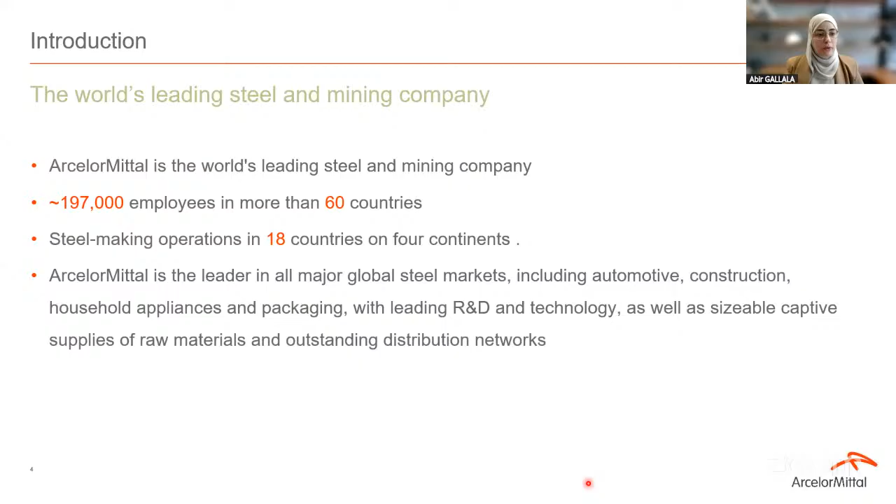Through cutting edge technology and innovation, the company is transforming the steel industry by creating advanced low carbon solutions that support a more sustainable and future-ready world. So here are just some highlights of where you can find us.

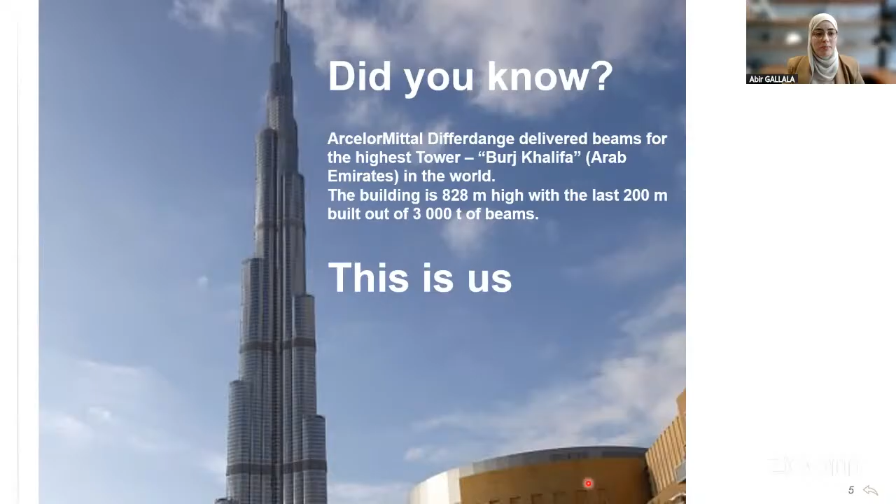For the Burj Khalifa in Dubai, we produced 3 kiloton of beams in Differdange, Luxembourg. Also, you can find us in Venice, Italy, where we produced 150 kiloton of steel for the MOSE project. And also the Freedom Tower, made of beams from Differdange.

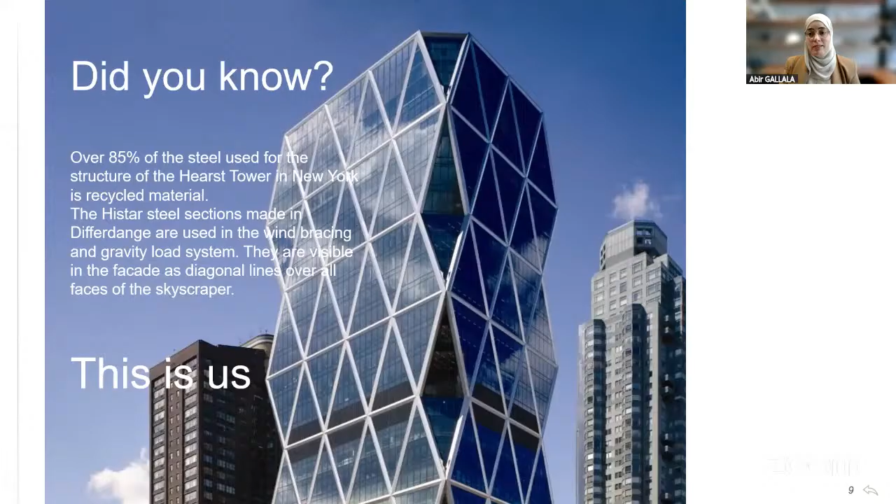Luxembourg has long products and flat products segments. For the long products, it's more for infrastructure, construction, energy, mechanical engineering, automotive, and so on, and we are focused on infrastructure sheet piling.

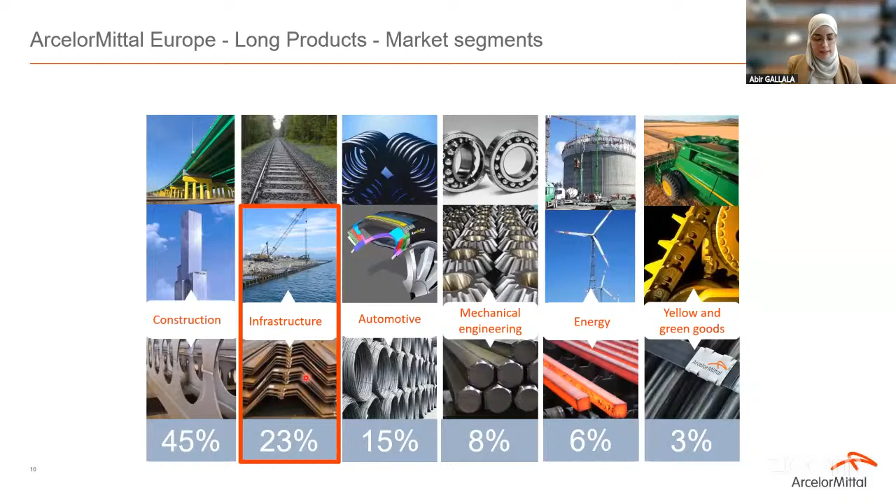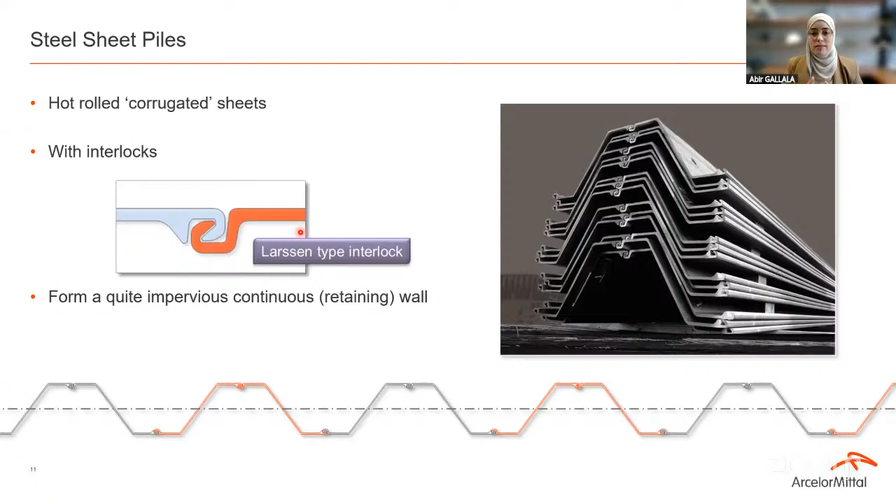To understand what steel sheet piles are: these are steel plates, interlocked steel sections together, used to build walls that retain soil or water, like retaining walls, cofferdams, foundations, also providing strength and durability, and are also very easy to install.

For sheet piles, we produce in Luxembourg with 2 mills, in Belval and Differdange, for hot rolling, and in Poland at the Dabrowa mill, and also one in France for cold formed products.

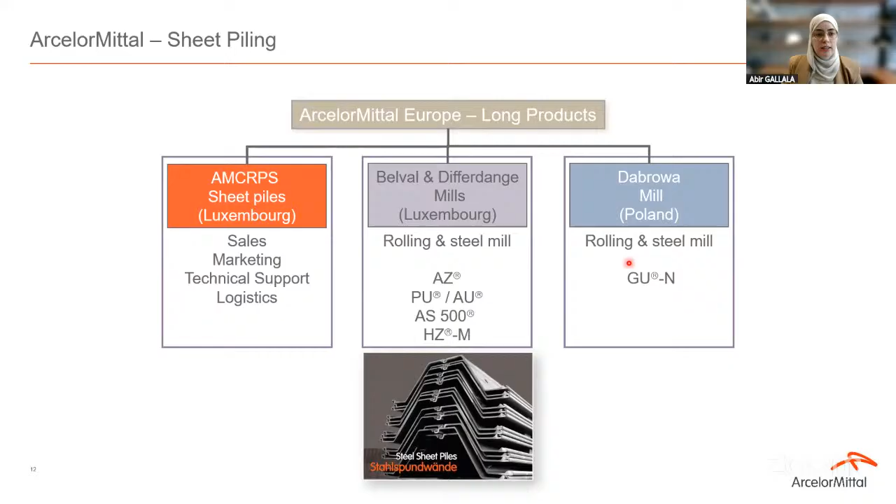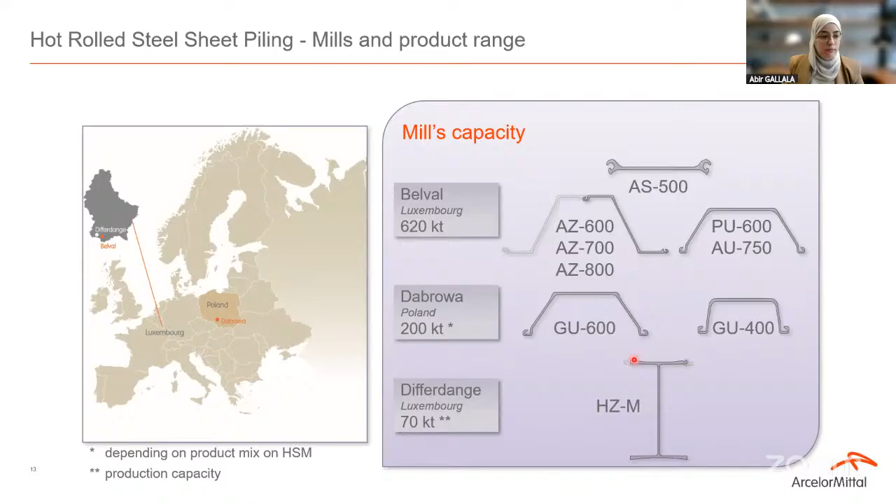For what we produce in Luxembourg and Dabrowa, Poland, there are different profiles depending on the size, dimension, or shape. We have the AS flat or the AZ, what we call AZ, PU, or in Dabrowa, Poland, different GU, and in Differdange, the beams, what we call HZ-M, also with different production capacities.

So where or how do we use these sheet piles produced in Luxembourg or Poland? We have 5 main applications, 4 of them being permanent solutions: one for mobility infrastructure, for water transport solutions like breakwaters and port quay walls, hazard protection like dikes, and environmental protection solutions to isolate some space or area in the water, for example, or in the ground.

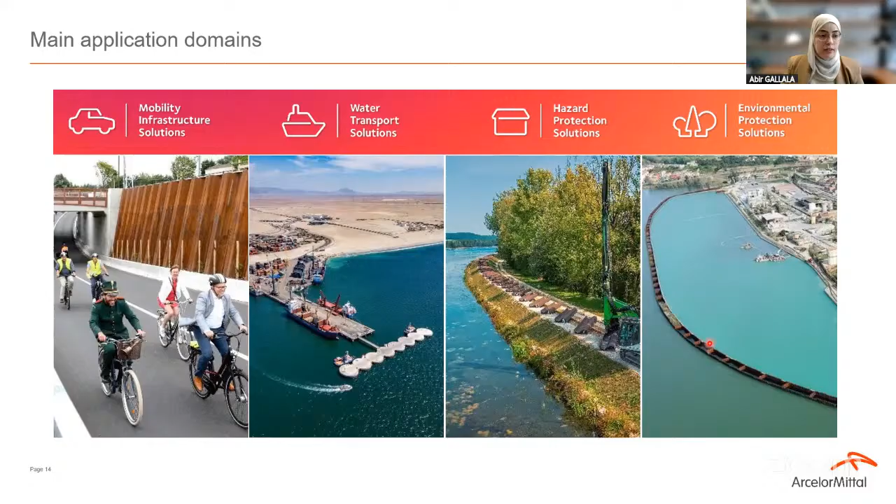So a few examples of our permanent structures: we produce sheet piles for a retaining wall for a metro line in Denmark. Here you can see in Poland a bridge abutment, also a quay wall in Poland, and in Germany a flood protection solution and dikes.

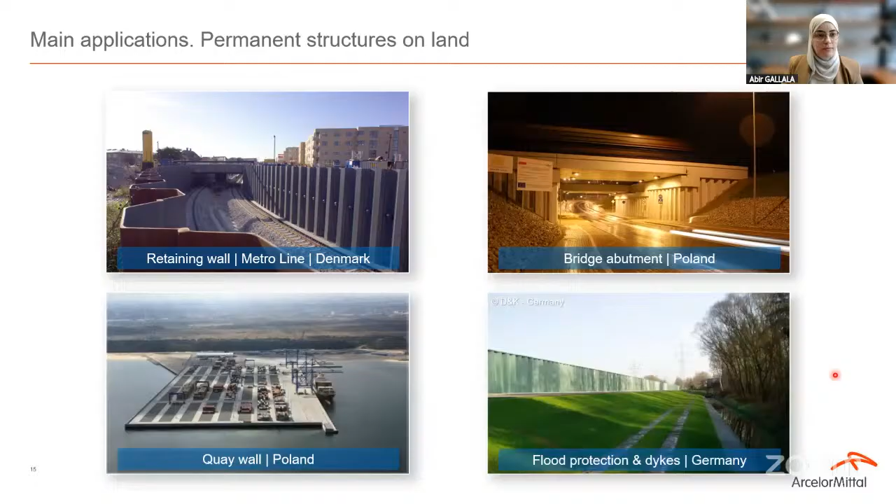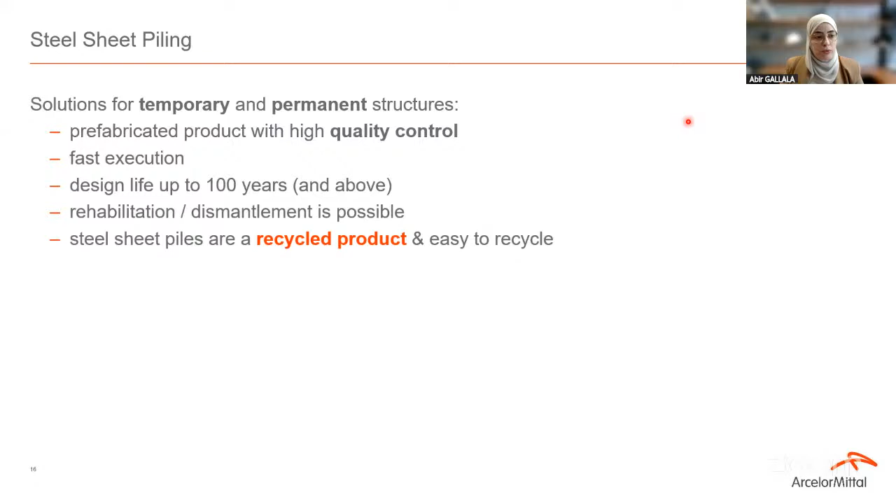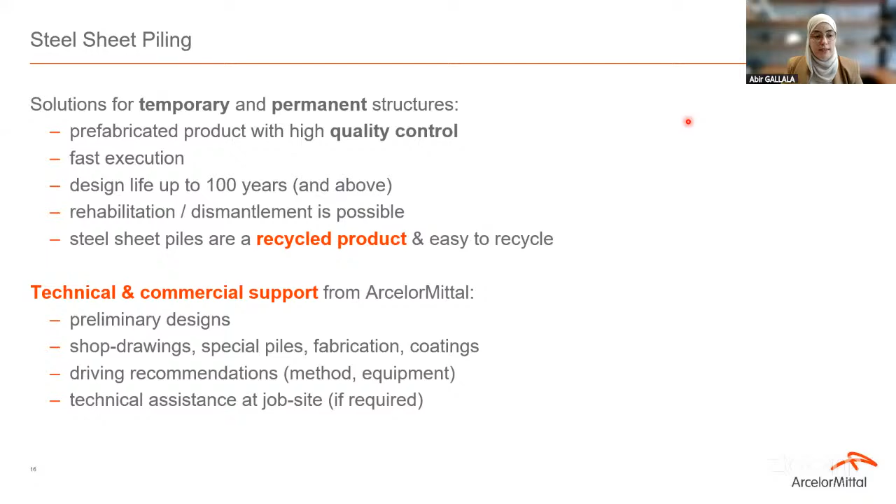Both temporary and permanent structures are prefabricated products ready to be installed with very high quality and fast execution, with a lifetime of up to 100 years and above, and also recycled materials that are very easy to recycle and reuse. What we also provide at ArcelorMittal includes preliminary designs, special piles, fabrication coating for some applications, driving recommendations for installation methods and equipment, technical assistance at job sites, and more services.

Now let's move to structural health monitoring, which is one of the services we end up providing. But let's first understand what structural health monitoring is.

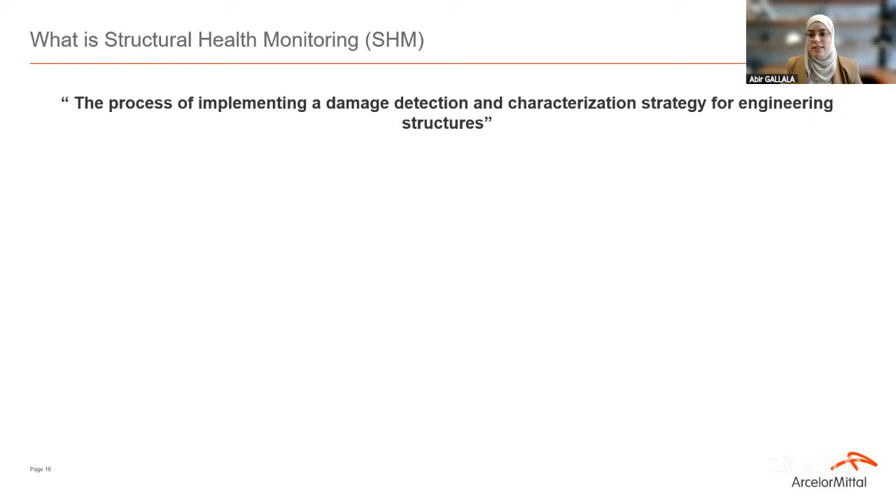What we call SHM, structural health monitoring, is the process of implementing a damage detection and characterization strategy for engineering structures. It involves using sensors and data acquisition systems, as well as analytical tools, to assess the condition of the structure over time, alerting and monitoring critical parameters such as deformation, stress, vibration, corrosion, and displacement, and providing insight into the structural integrity of the asset. It's not only to enhance the safety of infrastructure but also to reduce maintenance costs by enabling predictive maintenance and to extend the service life of the structure.

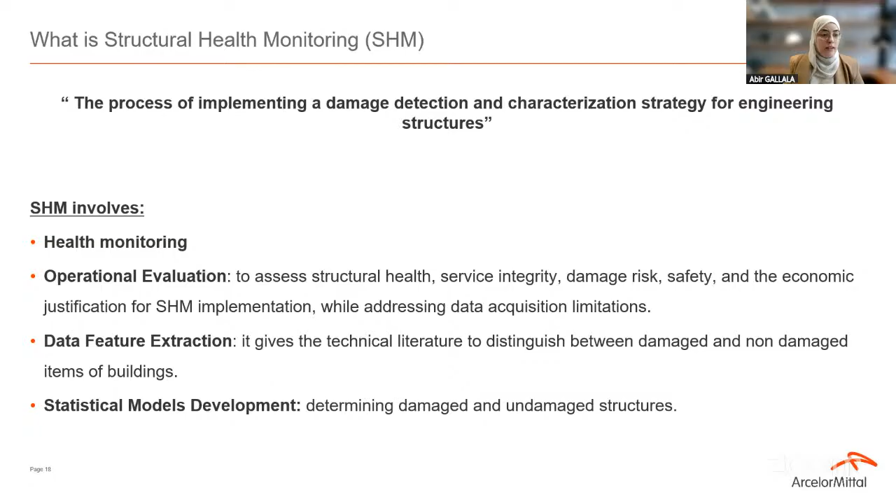So why do we need such solutions or systems?

The first reason is always safety of people and assets, especially aging infrastructure that requires constant monitoring and maintenance. Structural health monitoring offers a cost-effective way to monitor the condition of these assets, and to send or trigger real-time alerts related to operational problems or environmental damage. It also provides early warnings and signs of weaknesses or environmental events, helping to prevent disasters and minimize damage by enhancing decision making.

Some other reasons I can mention: increasing the structure's expected lifetime by tracking its current condition and historical condition. At the end of its lifetime, we can decide if we can still safely use this structure, so we are increasing the lifetime and usage, and also addressing issues of scale.

By monitoring hundreds of kilometers or millions of structures, if you have a platform just to monitor this, the asset or project owner is not obliged to go there to check every meter, every pile, or every section of the asset.

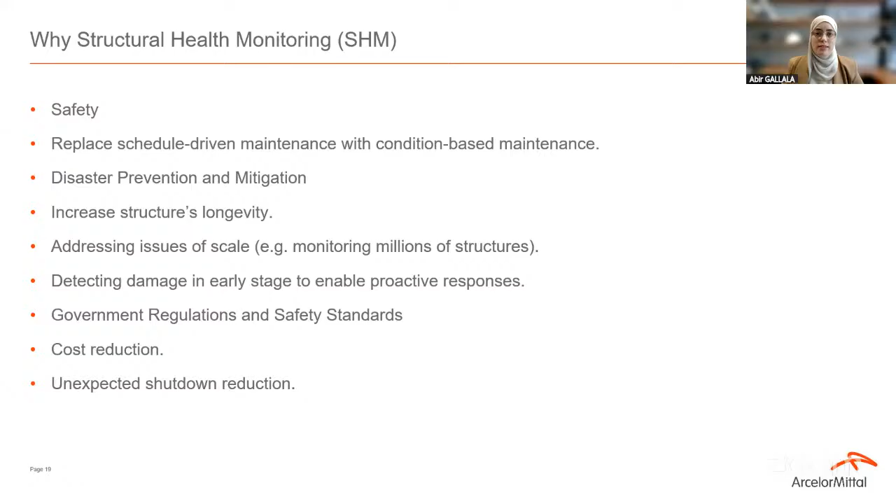Also, an important reason is cost reduction by removing unexpected shutdowns or needs for maintenance. Otherwise, they have to close the whole structure for a time, which can be expensive.

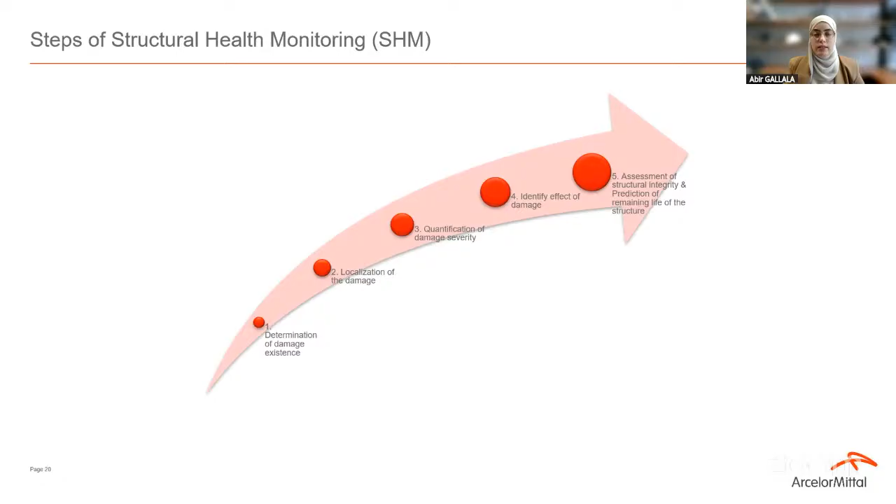So, the steps of structural health monitoring: the first step is to determine or define the damage that exists now—if there is damage, we need to know about it. The second step is to localize it, meaning we need to know exactly where it is, on which section of the asset, and how much damage there is. Then we identify the effect of the damage, and we take the decision or make a prediction for the remaining lifetime, the structural integrity, and the health condition of this asset.

So how do we inspect or monitor the structure? One traditional method is visual inspection, but this method is somewhat risky. It requires labor-intensive work and isn't accessible for all structures—sometimes structures are underground or in the water, making them inaccessible locations we can't really inspect. This mission also needs fully experienced people, and it's somewhat subjective: we can't define exactly how much the damage is, we can't cover all the locations where damage exists, and we need different technologies, equipment, and machines to do this inspection.

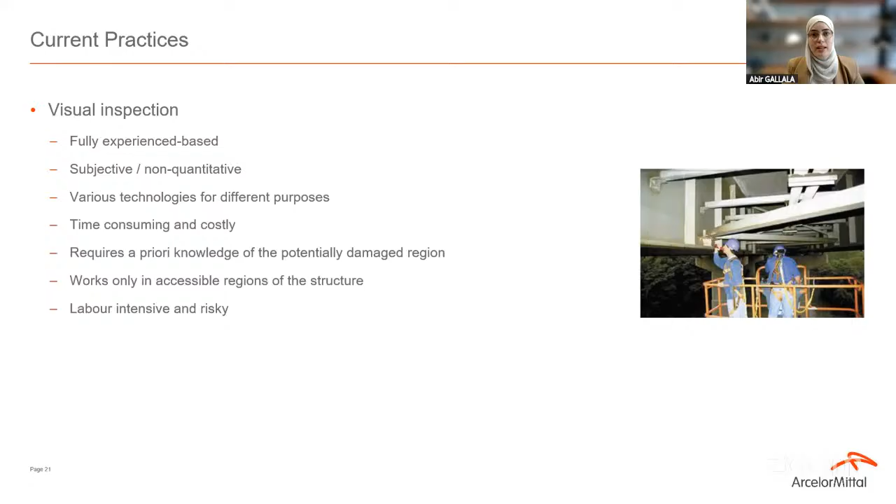It's very time consuming and costly, and sometimes it's too late, so we really can't define the best timing to go into this inspection.

Another method is sensor based, using real-time data collection. We embed sensors on the structure and collect data in real time to prevent any event or failure, and also to reduce maintenance costs.

The technology of the sensors can really be different from one application to another, and with improving technology we can have very advanced smart sensors, dedicated either to each parameter to be monitored or to a group of parameters.

We can also use wireless sensor networks, which is a bit challenging due to data transmission, energy consumption, and data reliability. It remains a real challenge, unless we use wired sensors or wired technologies instead of wireless.

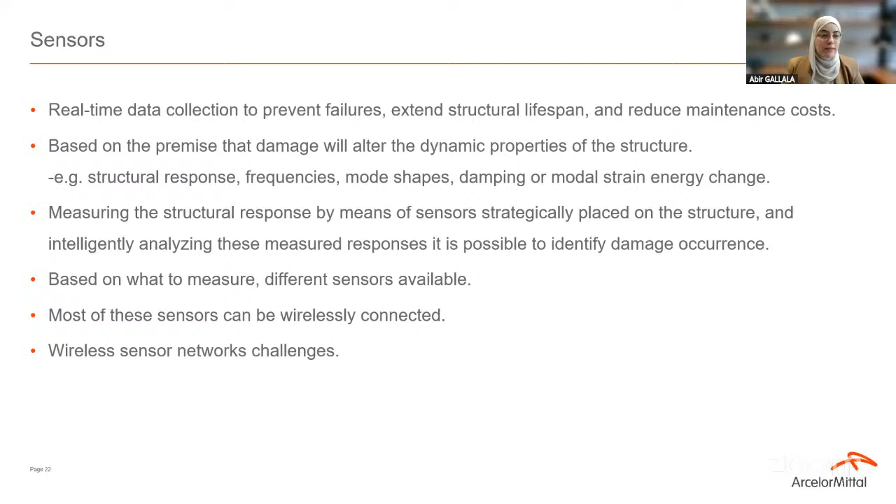The steps for structural health monitoring using sensors: first, the operational evaluation. We need to define what to measure, where to measure, how much, which sensors, and so on.

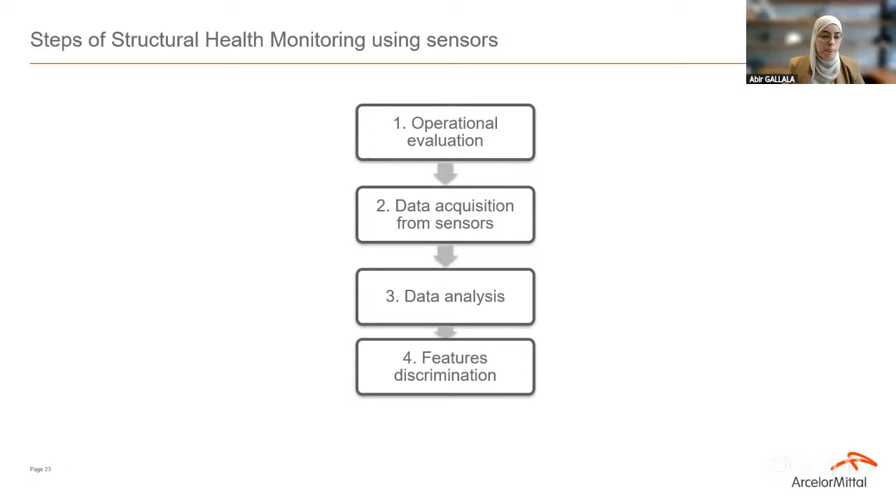Then we implement the solution. We start the data acquisition from the sensors, we analyze the data, and then the features discrimination to use this information we are getting from the system.

Some examples of structural health monitoring, a very important application could be offshore wind farms. The primary challenge here to deploy a structural health monitoring system is the environmental challenge and also the accessibility of the system, the dynamic load applied to the structure, and also the power supply.

So for this case, we can also use edge technologies such as Internet of Things and artificial intelligence to enable real-time data transmission from the sensors using wireless networks. This resolves somehow the power supply issue, and also supports remote monitoring by reducing the need for frequent on-site visits and inspection.

Artificial intelligence can use machine learning to analyze the large data set for anomaly detection and then for predictive maintenance, also to identify fatigue, stress, and anomalies in terms of operational or environmental damage.

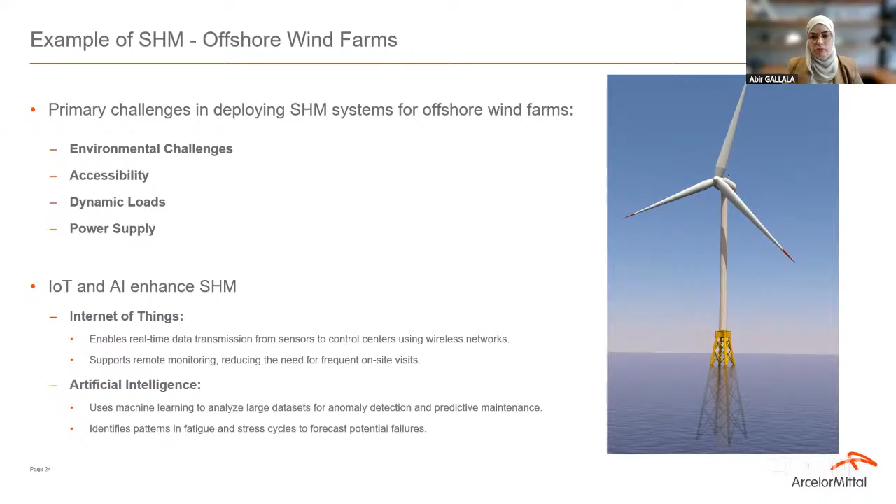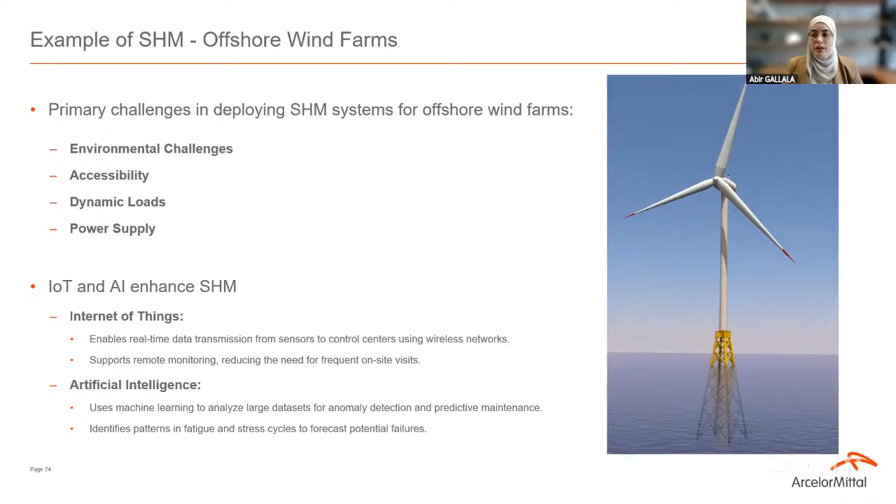In this condition, it's a remote location that makes physical inspection very expensive and difficult. The wind turbines experience cyclic fatigue loads from wind and wave forces, leading to gradual wear and tear. The remote offshore sites require self-sufficient power sources such as energy harvesting sensors or battery-powered sensors, so some advanced technologies.

Another example could be bridges monitoring. It's very important to early detect damage, to identify cracks, corrosion, any unusual stress levels before they become very critical, because with bridges we are talking about the safety of people as well, not only assets.

We also monitor the traffic load, recording in real time the data on vehicle loads to assess structural performance under different traffic conditions. This can also be beneficial for governments, since we were talking about standards and regulations. So one of these solutions for bridges, for the safety of people, is to use this kind of monitoring system.

The environmental impact analysis measures the effects of temperature, wind, humidity, and stress on the bridge structure, and so on.

It's also very important to monitor vibration and analyze excessive vibration that could lead to structural fatigue or resonance failure.

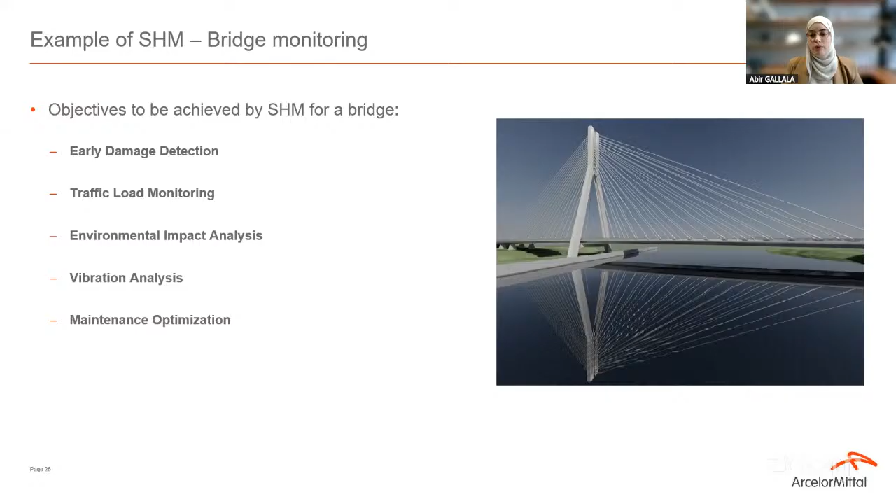Maintenance optimization: of course, we want at the end to provide actionable insights to plan maintenance proactively, to reduce downtime and also to save costs.

Moving to one of the important applications that use monitoring: ports and maritime applications. Stability and structural integrity is one of the most important objectives we need to achieve using this solution, to ensure the quay wall remains stable under any static or dynamic loads.

On the quay walls we also have heavy loads sometimes because of the containers, the ships, the cranes, the cargos, and so on. Here we can monitor the strain, putting strain gauge sensors to measure the stress and movements in the wall.

For monitoring environmental impact, we want to assess the impact of tides, waves, on the quay wall foundation of the structure. We monitor erosion and sediment displacement and other parameters.

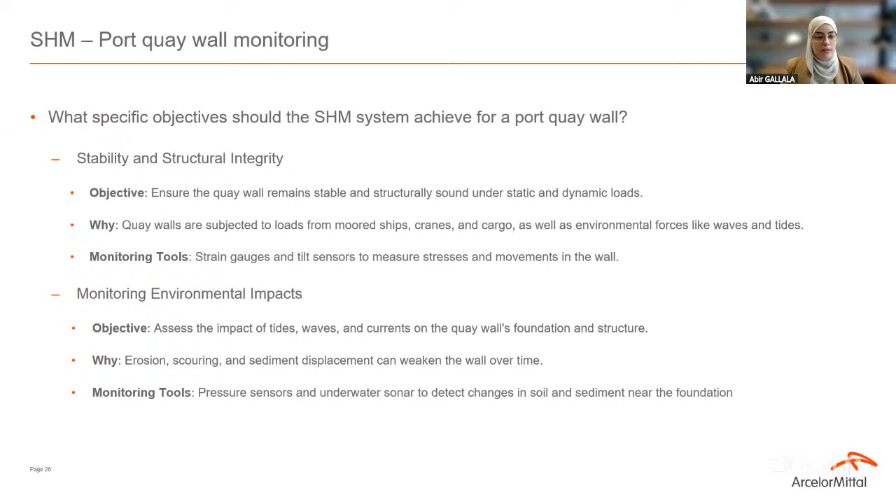It's very important to monitor the detection of deformation on the wall to identify cracks and deformation on the structure at an early stage, because this is important to know at a very early stage. Here we can use different technologies to monitor these, one solution could be fiber optic sensors for displacements and to measure the cracks.

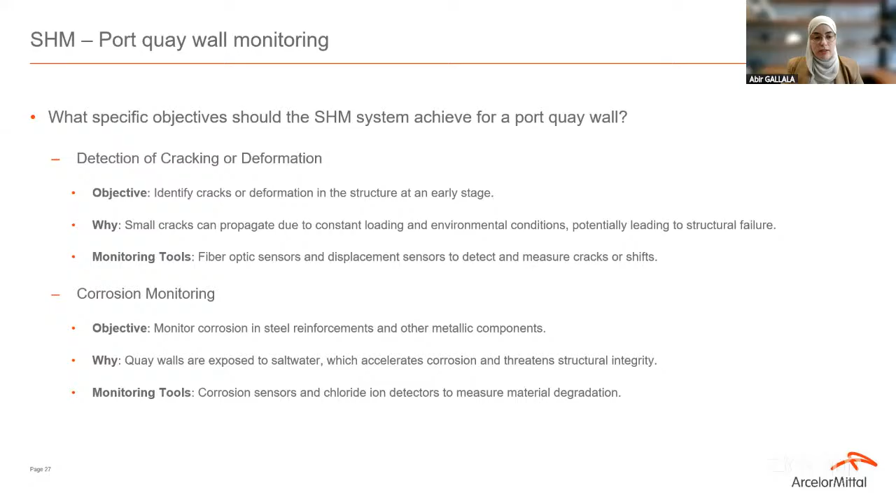One of the most important parameters to monitor in a maritime application, of course, is corrosion. So monitoring corrosion to predict the wall thickness or the existence of any corroded area or holes. There are different technologies of corrosion detection sensors, either on the water side or the soil side.

Then I want to mention one key technology that really plays a crucial role in structural health monitoring, which is digital twin technology. First, what is it for people who don't know? Basically, it's something that should answer some questions: what is the activity, or what is the condition? What is going on there? So we have what, where, when, who, and also why sometimes.

What is the current condition? Where is the location? If we have damage, where is the damage? And also when is it, when did it start, and who made it? We will see how to notice that. So it sounds like a foundation for decision making, and what to do now, what to do next. Do I have to tackle the problem which is visible in the digital twin, or look for the long term?

It is about events. So we collect the raw data, we extract or get insights and context, so we transform the data to information. The most challenging part, I think, is collecting real and reliable data from sensors or from the physical twin or replica. That can be tricky because it can contain anomalies. This is why we really need data analytics and advanced technologies like AI to treat and analyze the data for fault detection as well.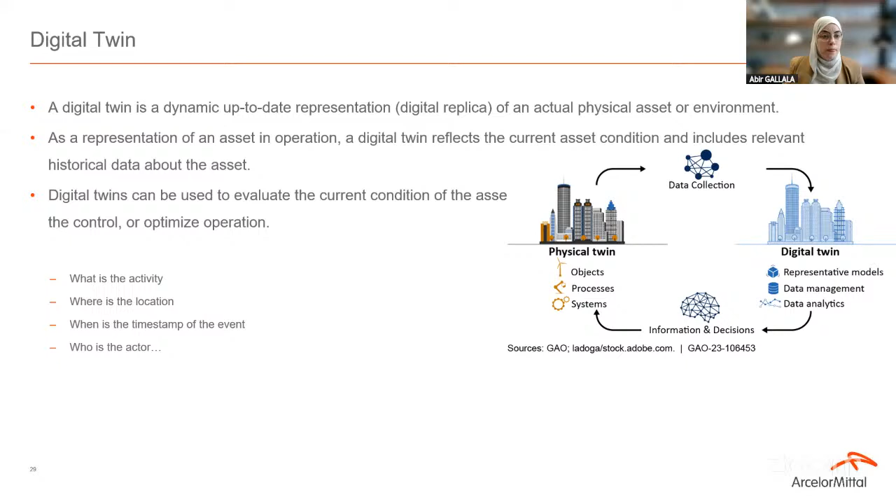The first category, which is also the first level of digital twin, we call the descriptive twin. It's the digital twin where it operates as a basic virtual replica or virtual model that simulates the physical object without automated data exchange, just the visual replica of the model.

The second category, which also represents the second level, is called the informative twin, where the digital twin at this level has real-time data exchange from the physical objects to the virtual model. This is where we start to put sensors to collect the data, allowing the system to react to changes in the physical objects, so we can see them on the digital model.

On the third category, we have 3 levels: predictive, comprehensive, and autonomous. Predictive is where we use AI, mainly machine learning algorithms, to identify patterns and predict future events, anomalies, behavior, and performance of the physical assets. So we know what is going on now, and we want to understand or predict what will happen next. At this level, the digital twin not only receives real-time data, but also uses advanced analytics and AI to predict the behavior.

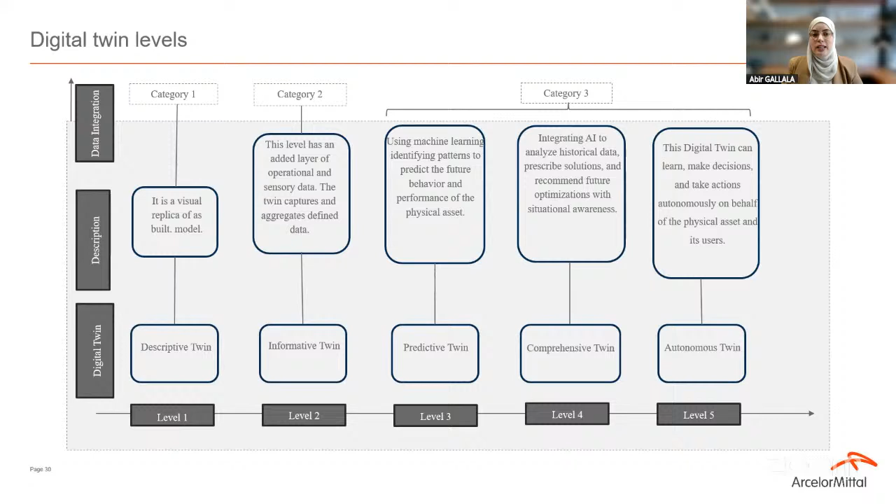At the fourth level, the comprehensive twin, we integrate more AI algorithms to analyze historical data, to prescribe solutions, and to recommend future optimization with some situational awareness. At the highest level of the third category, the digital twin can learn, make decisions, and also take actions. This is the most advanced level, where the system is autonomous and acts on behalf of the physical asset and the users as well.

So it's not applicable to all kinds of applications. This is very unique or dedicated for some unique applications.

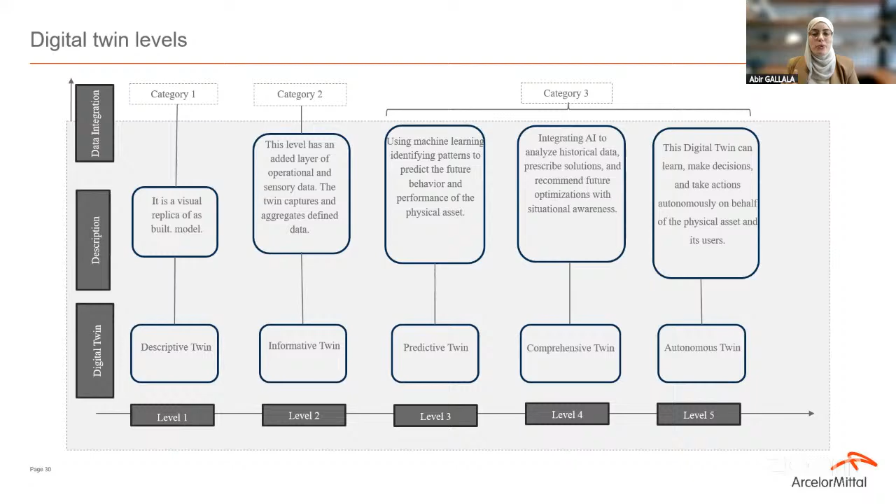As a recap for the structural health monitoring, especially about the digital twin, what are the real challenges that we can face? I already mentioned a few of them, but let's just resume.

Data availability: to have the digital twin models, we really require to integrate the data sources. We need to collect the data from the physical asset in order to analyze and get the insights and information. The better data we have, the better decisions we can make and the better insights we can have. Better meaning not just more data, but more reliable and good data.

Then we have the complexity of the data integration, which is more on the framework side, where we can lack standards or face challenges on the integration frameworks.

Then we have some technological advancements needed to reach high levels of digital twin. We really need to adopt innovative technologies and ongoing research. Honestly, we can't really achieve the highest level of digital twin technology yet; it's ongoing development, and this really depends on innovation and ongoing research.

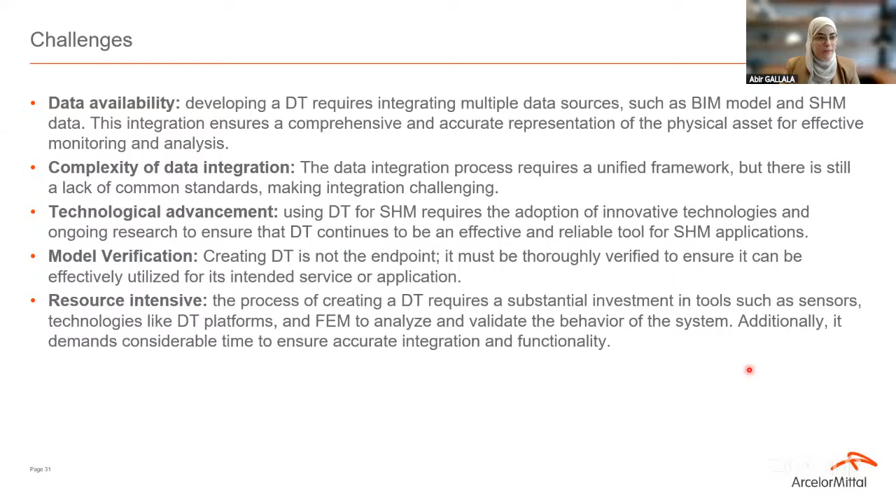So we could have even more challenges, but I tried to highlight the most existing or famous points. Now I'll move to a use case related to steel sheet piles, where we use exactly the same technologies in one of our solutions offered at ArcelorMittal Sheet Piles, called Smart Sheet Pile.

There we use structural health monitoring, digital twin, and all these technologies to monitor, detect, predict, and prevent damage, as well as to know the current and future condition.

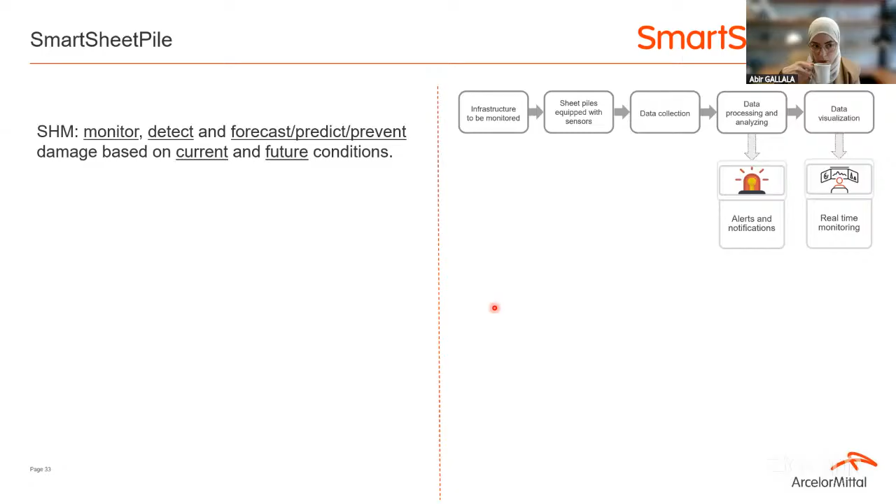Similar to other digital twin systems and structural health monitoring, it needs to answer the following questions: what is the current condition? If there is any damage, where is it? How much is it? When did it start? How much will it be in the future? And what about performance, safety, and so on?

At the end, the solution will provide real-time monitoring of the assets, as well as alerting and notification capabilities based on the preferences or specification of the project.

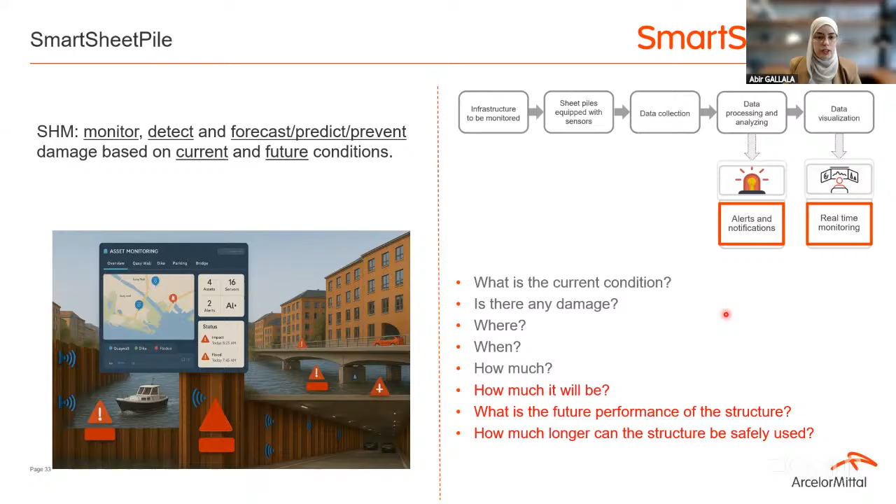Some added values that we've mostly covered already: it enables safety first, detecting accidental, operational, or environmental damage with early warnings. Also, by knowing exactly where the damage is and how much there is, we can schedule and achieve proactive maintenance, which is how we really save money and time.

So we avoid unexpected shutdowns and save costs from inconvenient maintenance. Also, by using this digital twin technology, we are really embracing digital transformation, having this multi-dimensional overview of the structure, its performance, and its interaction with the surroundings. This then acts as very effective asset management.

One point we did not mention yet, which is important, is revealing hidden capacities. For example, if we have a port quay wall, we can know the real capacities, the load applied, how much we can still use this quay wall, how much load we can still put there, and then we can really optimize the usage of the structure. This is just an example, but we can reveal lots of hidden capacities and maximize or optimize the usage of any structure at its full potential.

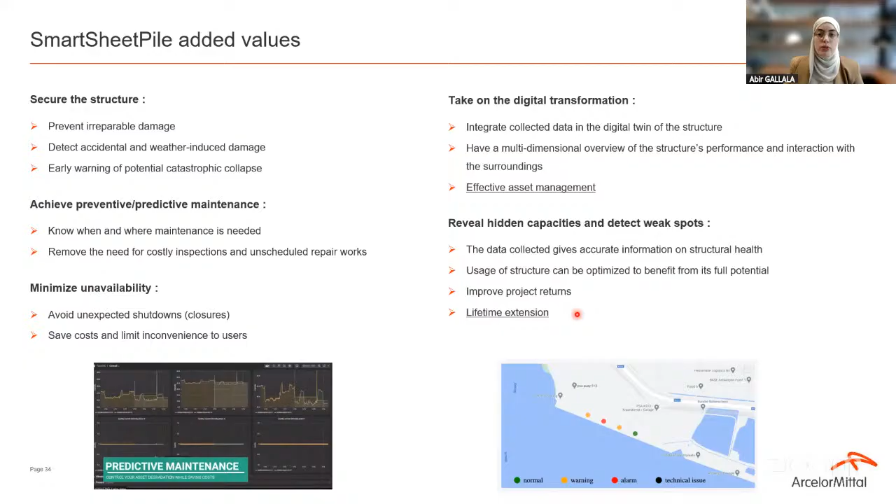So how do we achieve or implement the solution? First of all, it's not a standard solution - for each application domain, for each project, it's a very unique, customized solution. For each, we need to study and design what parameters to be monitored, the business case, the strategy of the project, and the preferences of what we want to monitor at the end.

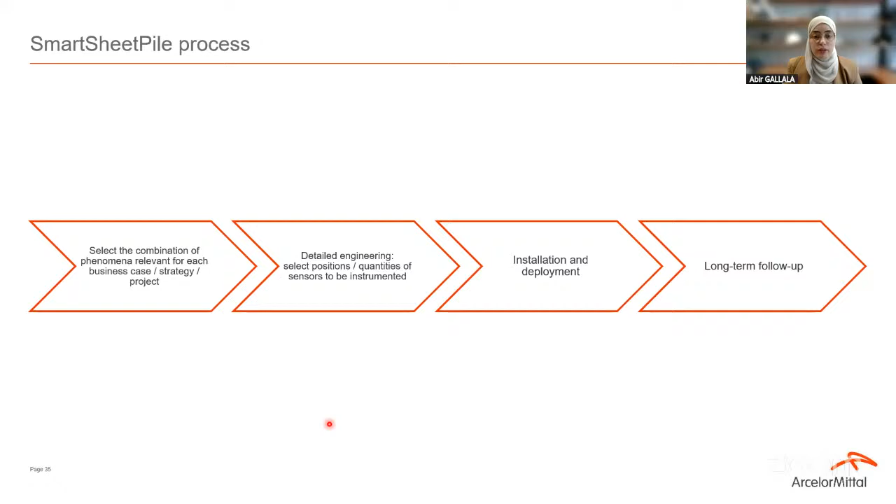After making the detailed proposition with the sensor proposition, the quantities of sensors to be instrumented and all these details, we install everything, drive the piles into the ground, and start the long-term follow-up. There we can use online dashboards for monitoring, receive alerts when something is detected or predicted, and use wired or wireless solutions with acquisition units to collect the data and send it to the cloud.

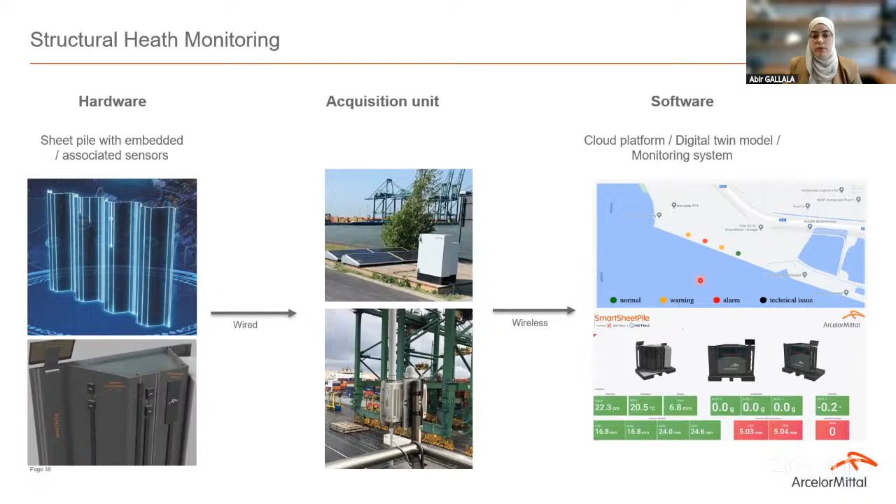From the cloud, we analyze the data and feed either AI algorithms, dashboards, or digital twin models. Of course, we need to use a bunch of edge technologies - mainly Internet of Things, AI, digital twin, communication, and big data analytics, because we're talking about not hundreds, not thousands, but maybe millions of data points.

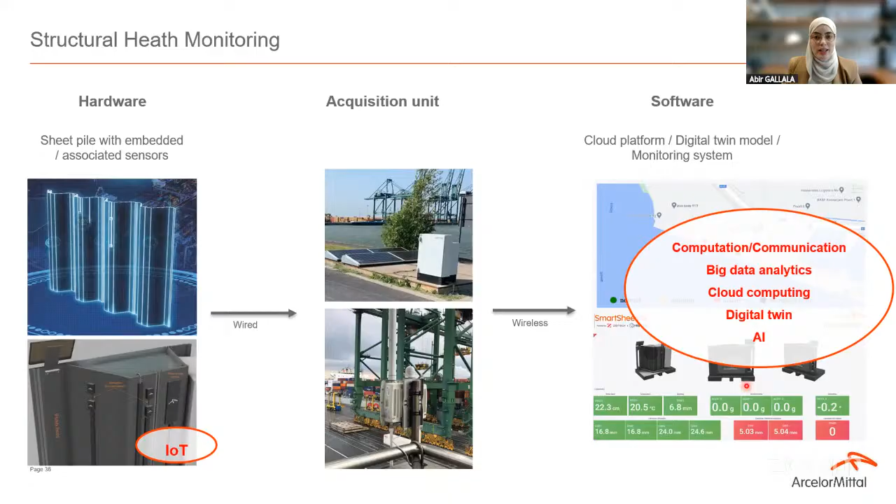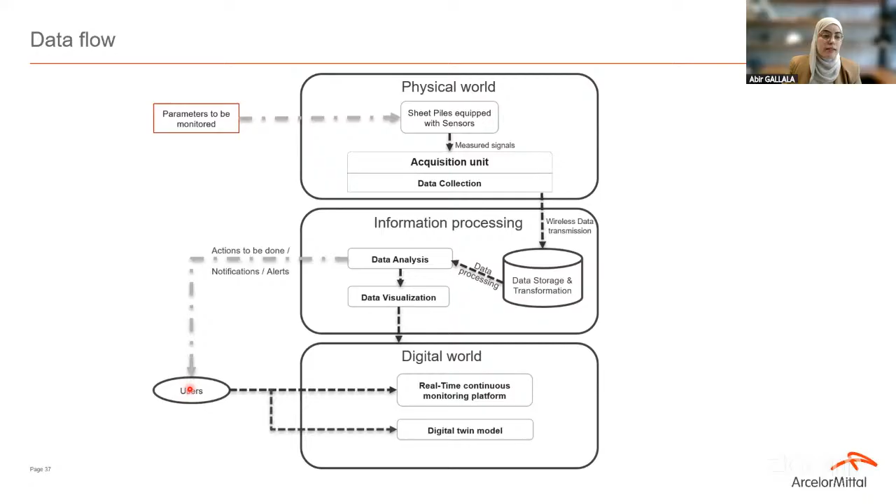So we need to define the parameters to be monitored, implement that on the sheet piles, install them on the ground, collect the data, store the data, analyze, process it, and then feed the platform for real-time monitoring, digital twin models, and also for the alerting system or actions to be taken. This is communicated to the end users.

Coming back to what we can monitor - everything related to the core behavior of the sheet piles, meaning parameters like corrosion, position, displacement, deformation, soil pressure, shocks or impacts on the wall, the force or load applied, and also anything related to the surrounding environment like water level, temperature, soil movements or inclination, and even more.

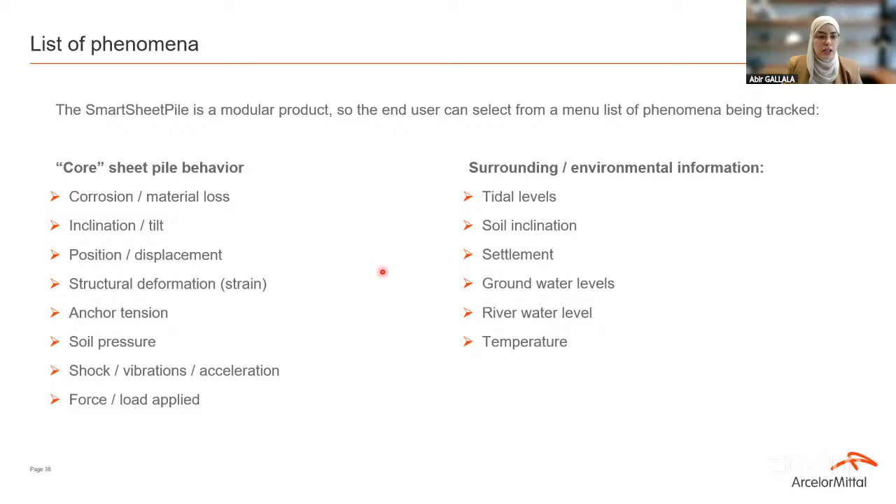So there we have different kinds of solutions, either wired or wireless. Wired, in terms of data transfer and energy consumption, could be more stable, but sometimes it's more expensive to implement or more challenging to maintain the cables. So the wireless solution in some cases could be even better, and there we can use batteries, solar power, or vibration energy harvesting for the sensors. Of course, each of these solutions has its own specifications and challenges.

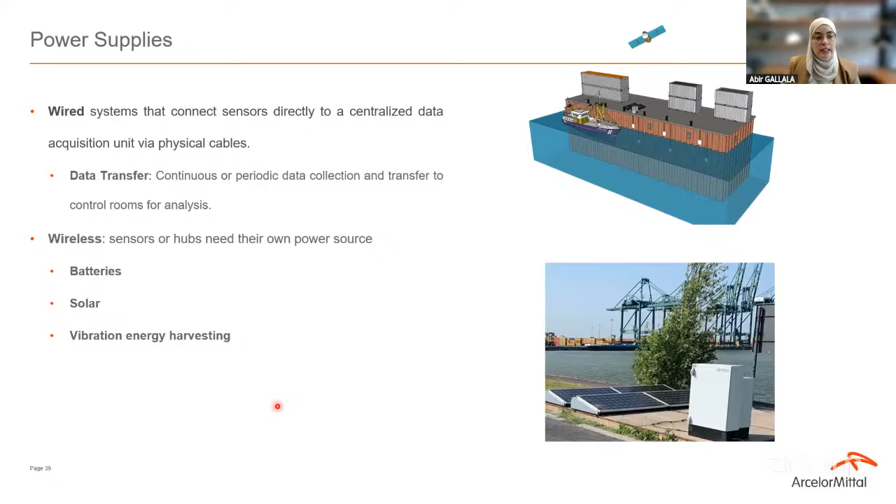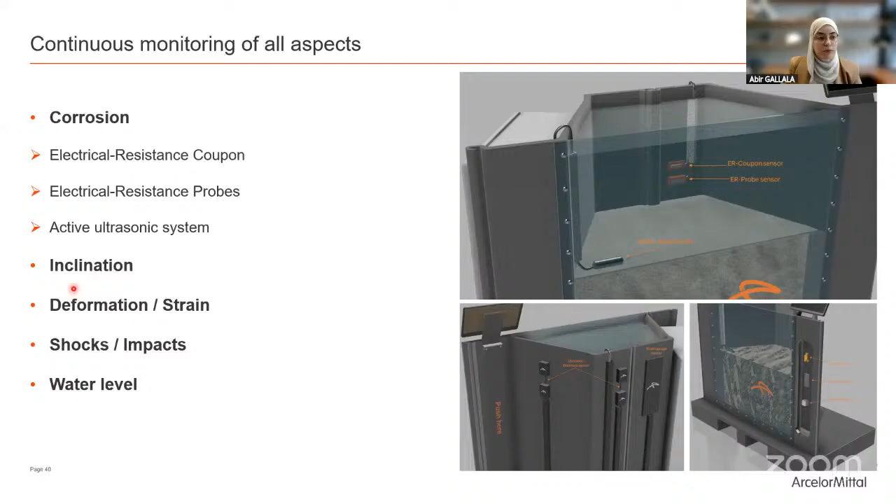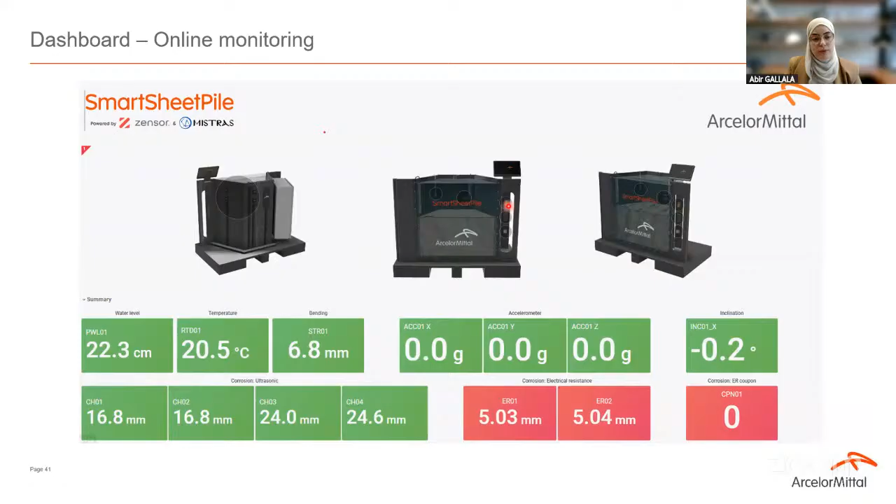Then we made the first demonstrator where we put some of the sensors we need for the monitoring, where we were able to monitor corrosion using different technologies like ultrasonic sensors, ER probes, ER coupons, also to monitor inclination, deformation, shocks, and water level. Then via the dashboard we can see everything in real time. If you want to deep dive into each parameter, you can click on it.

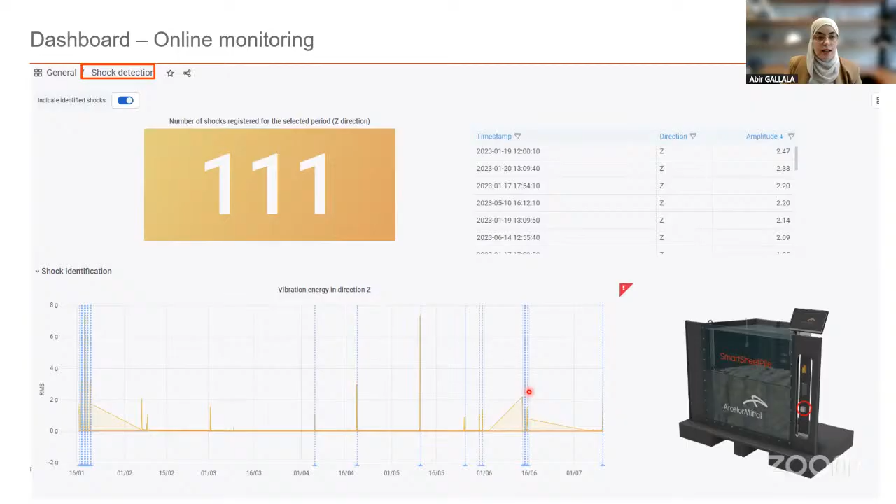We can filter the data. We can see exactly, for example, for the shock detection or the impacts, we can filter the data and see how much it is, when it started, and where exactly. The same for all the other parameters, like the bending, the shocks, the water level, and so on.

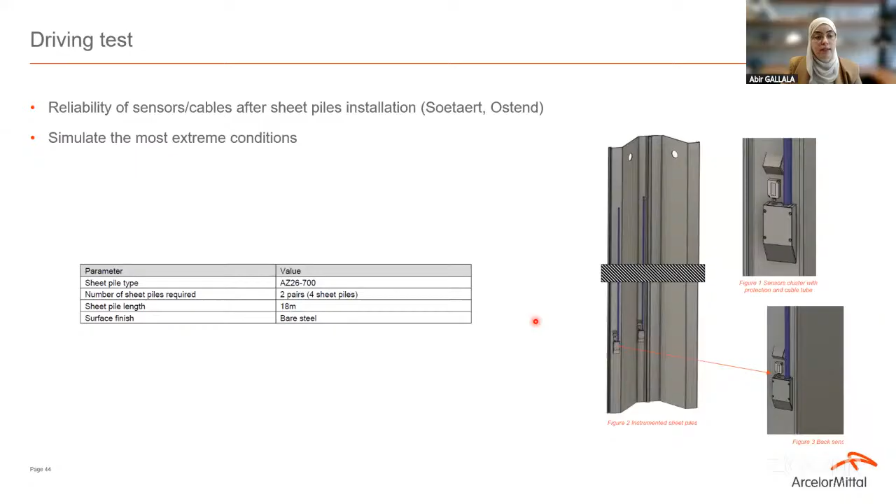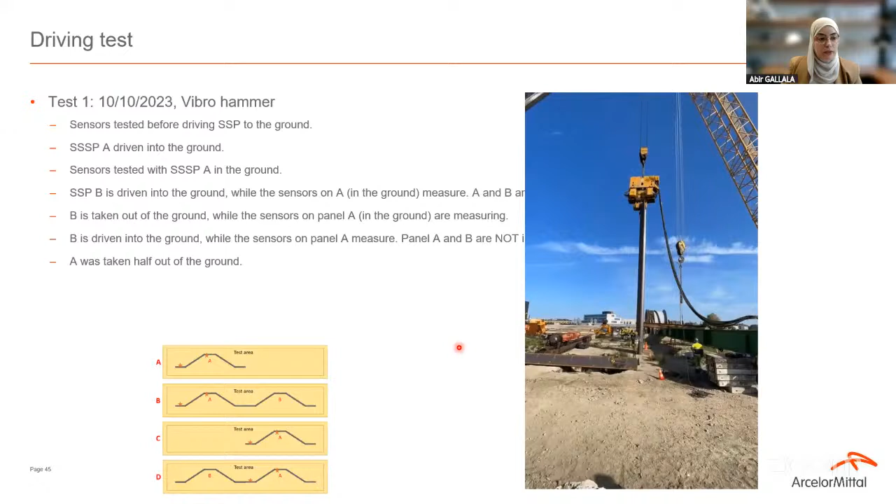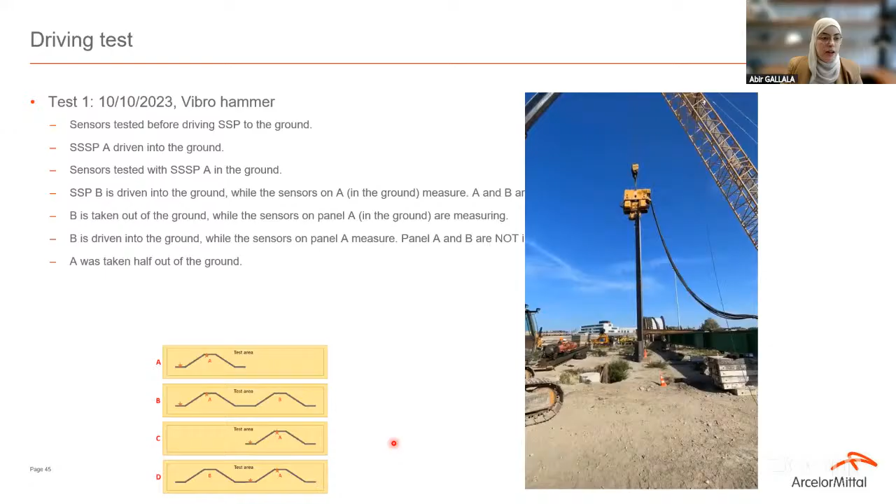Then we went into a driving test. We designed the piles and went through a driving test - we installed the pile one time into the ground, took it out, put it in again, and drove it into the ground 3 times. Every time we checked the reliability and resistance of the sensors and cables. This was the first test with a vibratory hammer, and after leaving the pile half driven in the ground for 1 month, we came back.

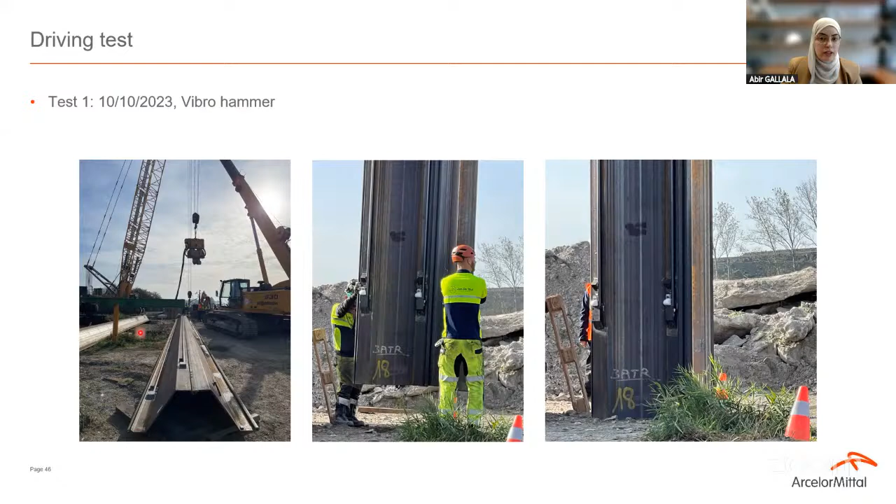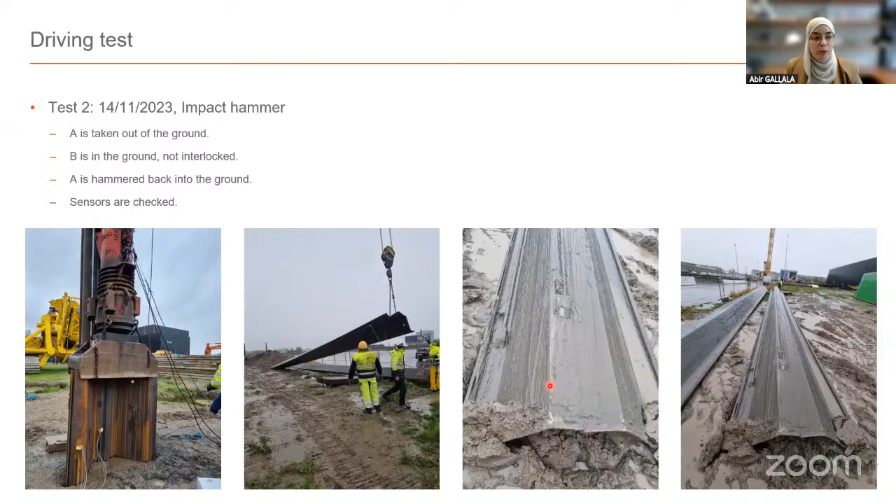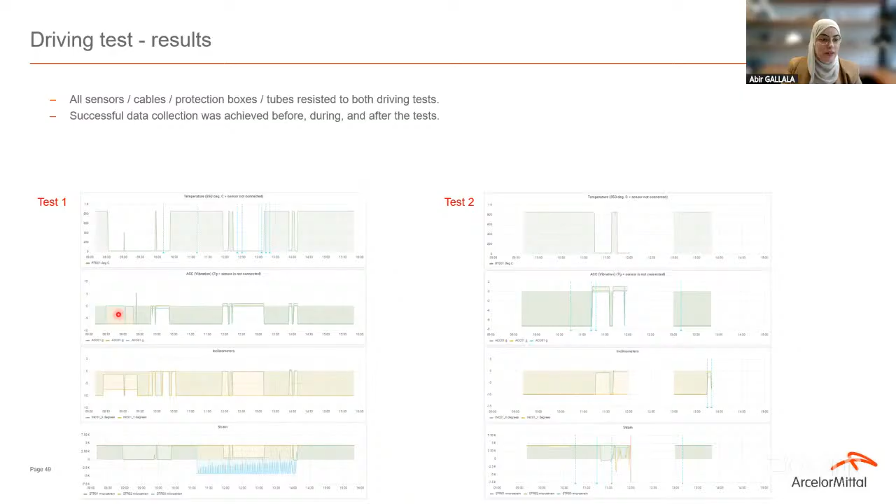We finished the test with harder conditions, using an impact hammer, and then measured again to see if any sensors or cables were damaged, because we protected everything well on the pile. During testing, we were able to collect data from almost all the sensors - none of the cables and sensors were damaged during the 2 phases of the test.

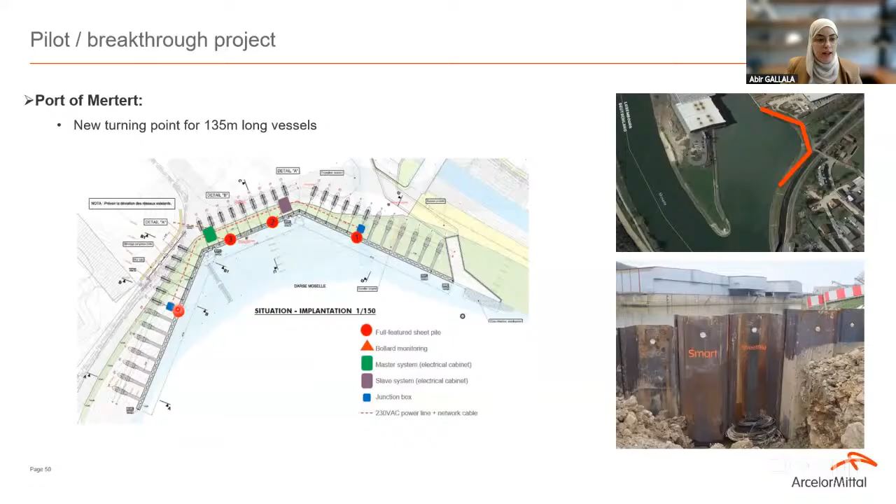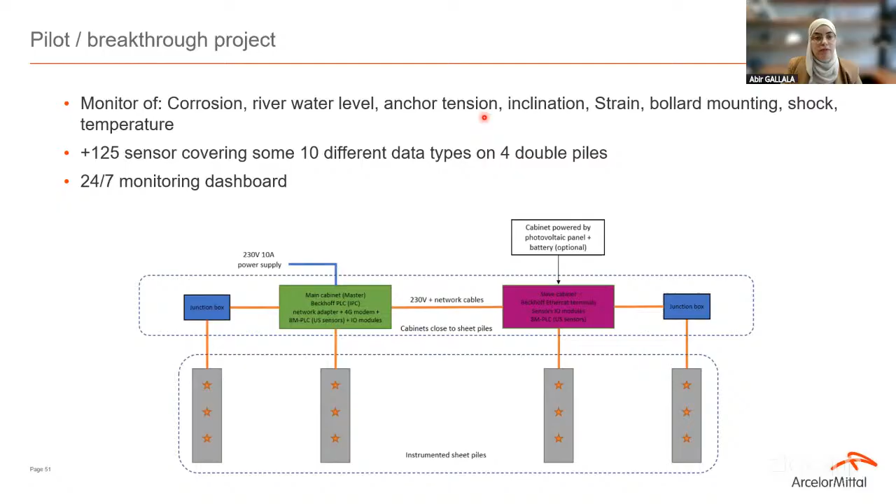Then we had the first project, which is a 135-meter long quay wall, where we implemented 4 double smart sheet piles within 100, or more than 125 sensors, where we covered almost 10 parameters like corrosion, water level, inclination, strain, shocks, temperature, and so on.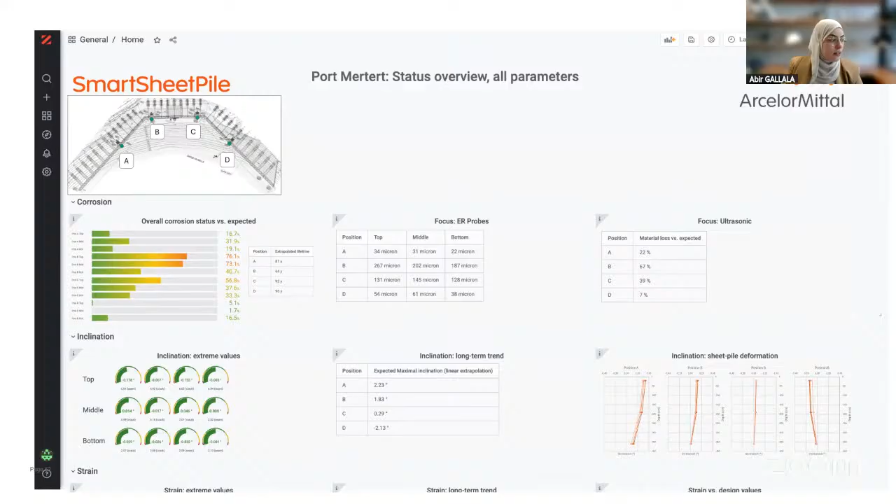And then on the dashboard, we can read what is going on, the prediction, even the expected lifetime, material loss, and so on for the different parameters, and then we're able to get alerts when something is detected. For example, if you want to get alerted when the water level is increasing, we will be able to see that or to receive alerts.

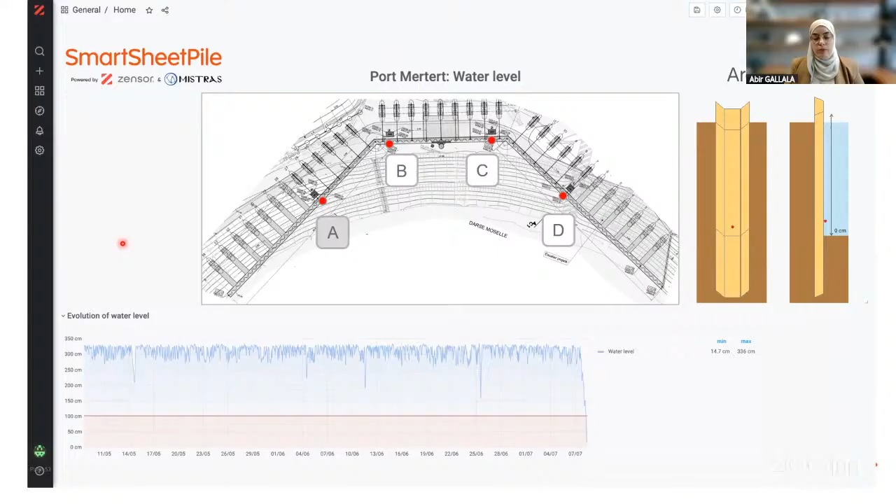Then we also use digital twin technology, using descriptive, informative approaches to go towards the predictive twin, where we compare the simulated data with the real data that we collect to make some predictions afterward.

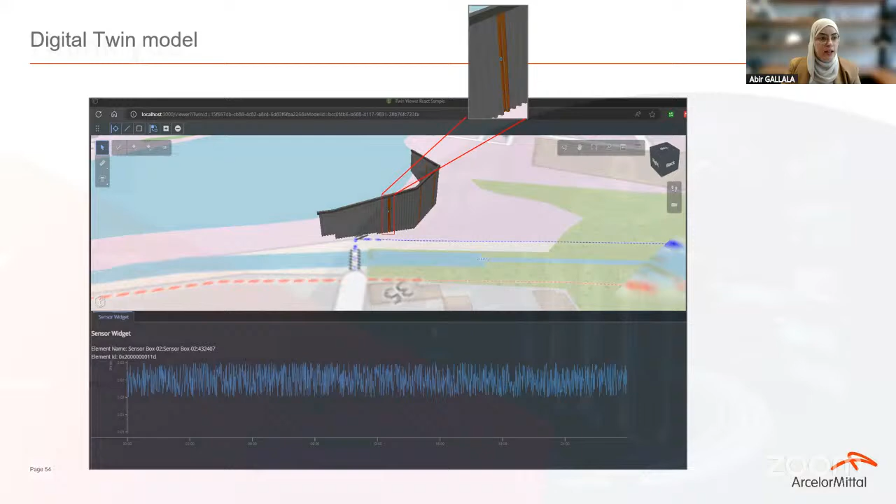Well, I think this is the last slide from the use case. I will have some water, and please feel free to ask if you have any questions.

Hi, thank you Abir for your talk. Unfortunately, most of the participants are over YouTube, and I'm not sure if they'll be able to ask questions or not. Maybe Teresa can confirm or deny that, but I'm not very familiar with the tool. We also have a few in this room who can feel free to ask questions. Due to the delay on YouTube, let's give them a second or two. Otherwise, I have a few questions myself. I'm looking at YouTube here, maybe something comes up. Please go ahead, oh, YouTube can also ask in chat. All right, okay, let's see.

Until somebody asks something, I'll go ahead with one question, more on the non-technical side. So you were presenting systems of structural health monitoring, and I wanted to ask, how can you assess their role in climate resilience, for example, considering increasing weather events and global warming? How do you think this technology can play a role, if at all?

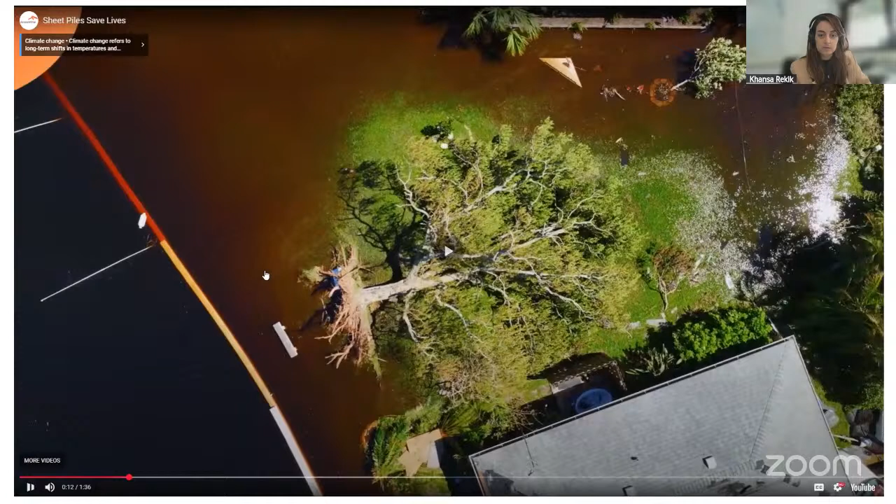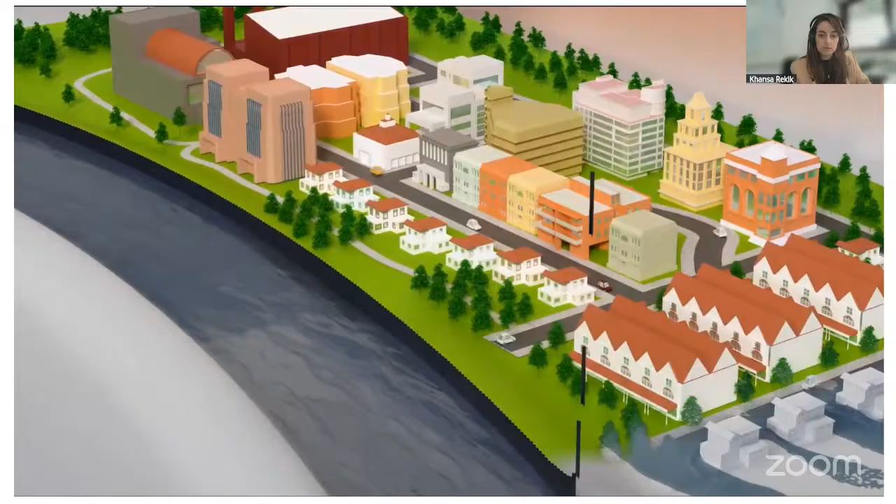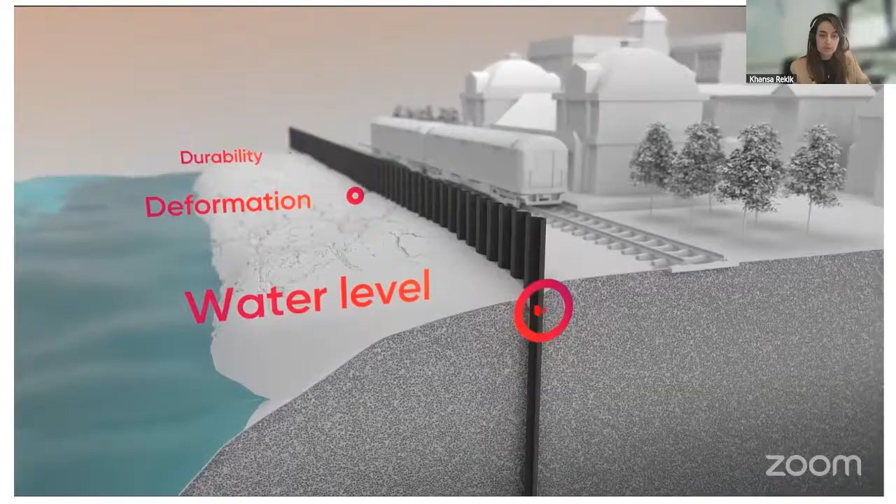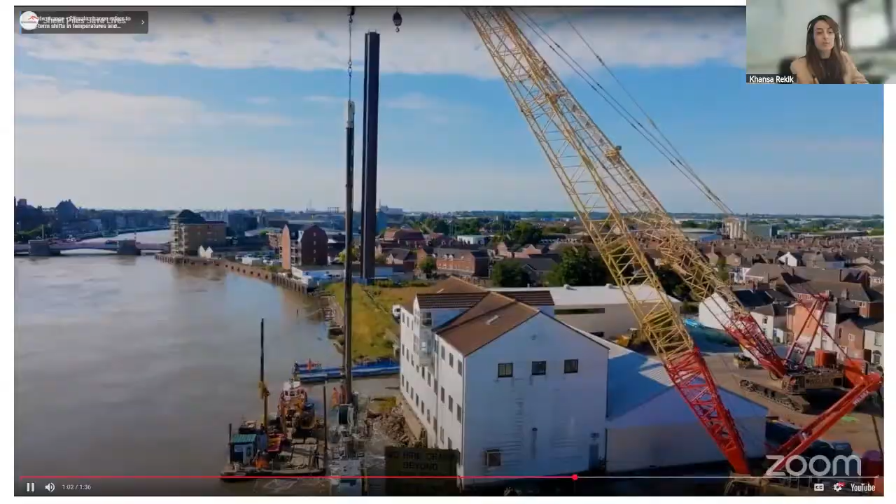Our world is fragile, but hope stands strong. Steel sheet piles can save lives. We at ArcelorMittal provide engineered solutions. Intelligent solutions. Strong solutions that will last for more than 100 years.

So I will stop it here, and I think we just made this to couple somehow our efforts toward climate resilience with smart solutions.

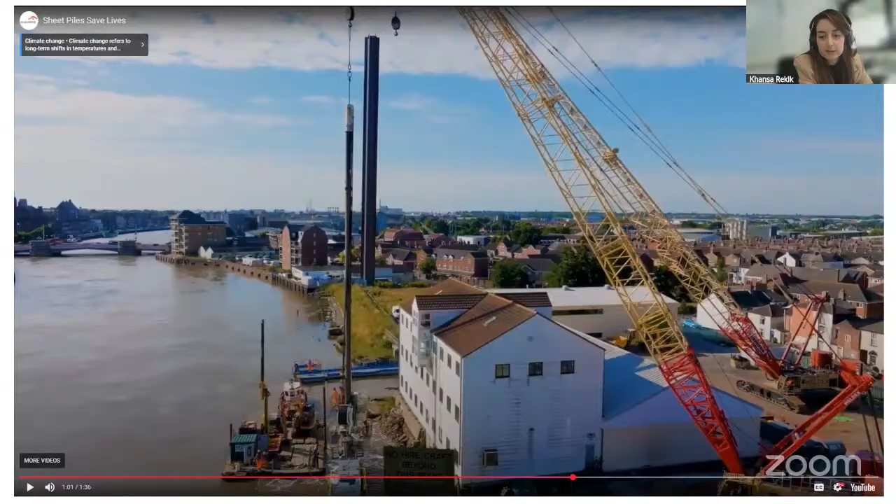So just to follow up on this, the examples you mentioned earlier, I think the whole idea is focused more or less on cities, probably developed countries. But how do you see that on a smaller scale, like in developing countries or smaller areas where fewer people live and probably have less investment power and so on? What are the challenges that such societies can face in implementing this technology?

You said already one of the challenges, they have less investment. We are talking about costs, and it's true or correct that it's often seen as the cost being the biggest challenge, especially with small cities, developing countries, and smaller municipalities and so on.

But let's say that upfront the investment can be high at the beginning, considering the equipment, installation, the technical expertise and so on needed for the project. However, if you look at it from the long-term perspective, the cost-benefit picture shifts significantly.

Structural health monitoring enables proactive maintenance, early detection of potential failures, even avoidance of catastrophic events sometimes by very fast decision making. This really can save money down the line, far more than the initial investment, if we make the calculation on the long term.